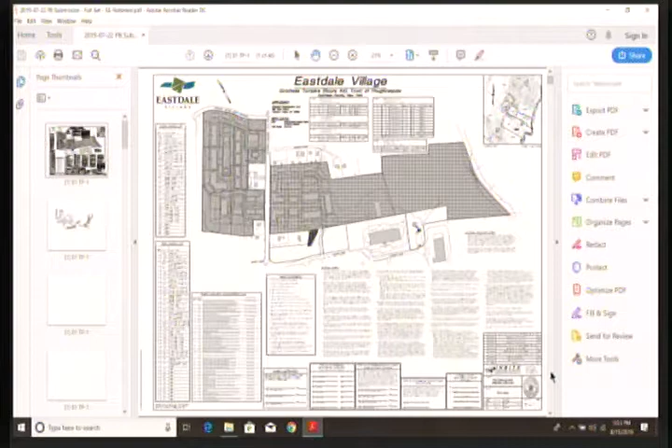Again, this is an overview of the west side of the project. Currently under construction are the three-story residential buildings 11, 10, 9, 8, and 7. Those are up, and in fact, building 11, all the way to the south on the site, is nearly complete. That'll be our building with models.

Building 1, which is the 50-unit, three-story elevator service building, is up and the finish work is ongoing there. The medical office building is up and all of the electrical and mechanical rough-in work is ongoing in that structure. We have the mail and leasing building under construction, and one of the cottages, Cottage D1, has been framed and is waiting to get the trusses and roof on that structure.

So quite a bit is going on in terms of the buildings, and a lot of the infrastructure, water, sewer, drainage, are going in as we sit here.

The work on Route 44, the DOT work, is proceeding across the frontage. This coming week we will be working at night, Monday, Tuesday, Wednesday, and Thursday evenings. There will be night work in that area, with one lane open overnight, but we have to close it down from the current 2-lane configuration to 1 lane to get some drainage and communication structures and communication lines across the road. So we have one week of night work, then we're back to the regular day schedule, with 2 lanes remaining open on 44 during the remainder of the roadway construction.

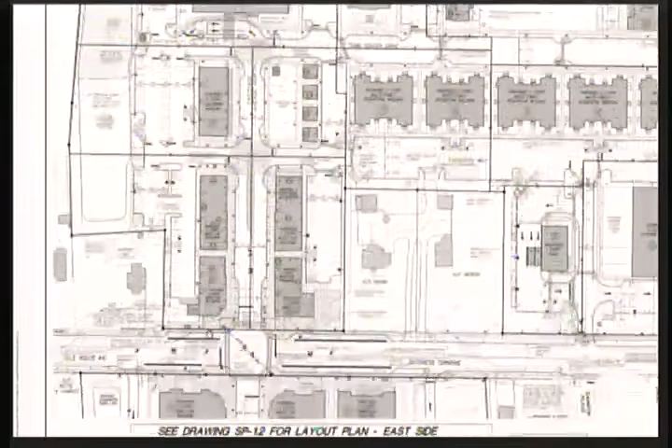We imagine each of these buildings built with party walls between the ones that are actually connected. But we've got really six buildings there, and then five buildings on Building E. The buildings will be separate, standalone — there'll be a party wall, but they'll have their own separate architecture, separate entrances and exits, and separate utilities serving each of these buildings. We've been able to really define those buildings more completely to meet the needs of the tenants there. So that's been going well.

I can go through this if you want, but we've talked in the submission about the number of stories of each of these buildings. Above each of them there are also residential units, one or two bedroom units depending, included as part of this development. For the most part, the A buildings on the south side of Eastdale Avenue are all proposed to be 2-story, at this point, with the proposed lessees. Some of them have basements, some don't.

On the north side of Eastdale Avenue, this front building, Building E1, is proposed as a 3-story building, drops back down to two 2-story buildings, then a 3-story building for the larger E4 building, and then back to a 2-story building. So we're going to get some variation in height as the buildings are further developed.

Architecture isn't complete on these. Really, our approach is we have partner tenants and owners in these buildings, so we'll ask for site plan approval first. Once site plan approval has been granted, we'll go back out and finish the funding with the lenders. That releases all of the remaining funds to complete the architecture, and we'll come back for architecture review so those buildings can move forward.

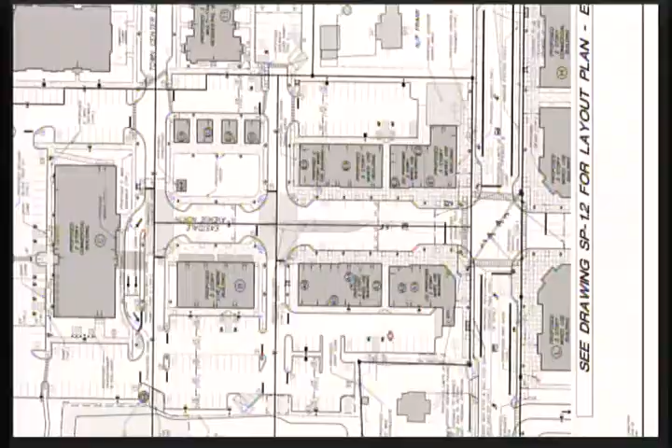The third thing we changed is we modified our phasing plan. This first phase, what we call phase 1 and phase 2A, really includes everything on the west side of 44, with the exception of these two pads out front - what we've called the bank and the daycare buildings F and G. Those are not included in this initial phase, so we are moving forward with the infrastructure and the work on the rest of those buildings.

Following site plan approval, we'll certainly be following up with building permits for the remaining buildings. The buildings that weren't in the initial phase that we've added are these two buildings back here - again, three-story elevator buildings, 2 and 3 - the townhouses, buildings 4, 5, and 6, and the remainder of commercial building B. I think those are the only additions to the phasing plan.

Yeah, but again, it's the garages in back also? I'm sorry, say again - the garages in the back also? Oh, and the garage in the back, yes, yes. I don't have them in my window here, but yes, and the garage in the back, yes, thank you.

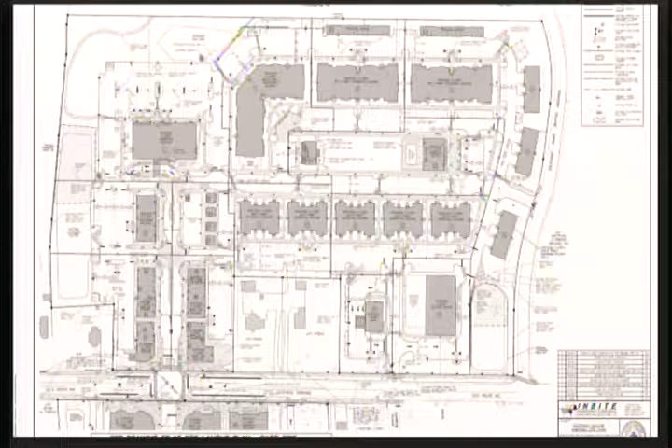And then the last change was something that was contemplated in all the original documents, and that was the outdoor dining. Going back to the commercial buildings, we have restaurant tenants that want outdoor dining for both building E1 and building E5. That'll have some outdoor seating for patrons at both of those buildings. There are specific requirements in the zoning code related to outdoor dining, and I believe as we described it, we meet those specific requirements.

Are they the only restaurant tenants, or are there additional ones? No, there may be other restaurants as well. Yeah, you have wide sidewalks, so they're always free to put a couple tables out too. Yes, and there may be some uses out in the front here, but these particularly lent themselves to a larger, more defined outdoor dining area.

So, all right, is that all? That was all, yes, initially. So we have some questions and comments about some of your comments. But yes, that was it. Yep, we'll get into that. Sure, let me go to Eric. Sure.

Staff, we have a number of comments - a few for discussion by the board packets. But assuming the board indicates some direction on those, we're recommending that you could proceed with a conditioned approval. I will note that in the resolution provided at the end, there's a typographical error in which it's printed as an approval for the third amended site plan, where that should be an approval for the fourth amended site plan. That's a typographical error in your resolution that should be corrected.

At the rear of the McCaffrey property, there's a fence, and they'd asked for a gate at the fence because they have a camper there—they wanted to be able to access it if necessary, to drive their vehicles through and exit onto the property. So that gate has always been there. That access was always one of the things we talked about. It's not something expected to be used regularly; they just asked to have a gate at the rear of the property to be able to exit the back end of their driveway. So we accommodated them and put the gate in. I don't know if that's what you're referring to at the backside.

Okay, so those are our comments. Great, thanks, Eric.

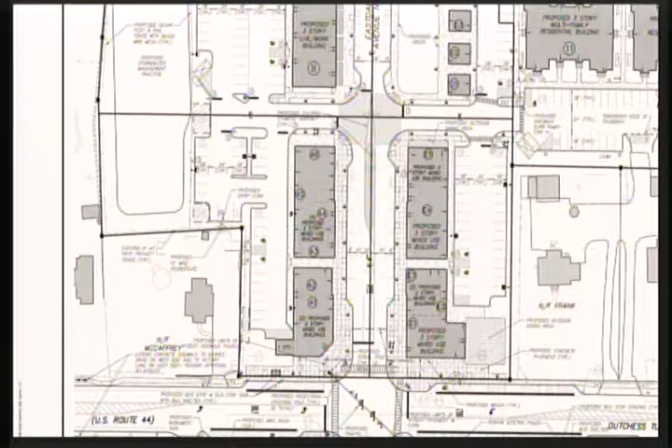Any new engineering issues right now? Jeff already mentioned the SWPPP addendum, which we had asked for. We wanted to see a little more detail on the Ortega connection, and were curious as to what the generator is going to be doing out by the parking area.

I'm going to do the generator first. That's—the elevators in buildings 1, 2, and 3 will be on that generator, so it's just a backup to power those. So is number one, the temporary access or future access to the Ortega property. And if I can zoom in a little bit here.

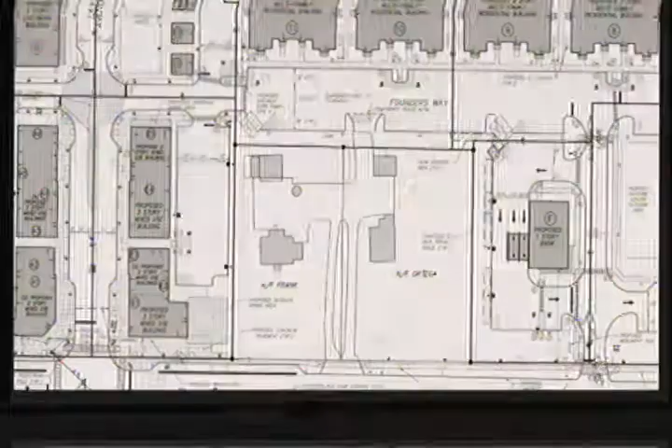Again, this is the Ortega site, currently the home of the leasing office for Eastdale. It was purchased, and we have not really integrated it into the overall site here, but we know at some point we're probably going to want to. So rather than build curbing or a situation out here that we'd then rip out within the year, we thought let's show what could be a future driveway access into the Ortega site, with a temporary grass berm so you can't drive through there.

I did notice that one of the plans actually shows a construction entrance pad that's not supposed to be on these plans—that'll come back out. That construction entrance isn't what's expected to happen there. This is just a future condition; we're trying to think ahead into the site so we'd have fewer changes in the future. So we've got a berm there, and created these two islands to channel traffic in the future.

As part of this process, part of the phasing plan, we recognize that to build Eastdale Avenue, we don't want people using the sidewalks right here in front of these buildings when we have to build the building right here. It's too unsafe. So recognizing that, and recognizing we're going to want to break ground on those buildings, what's the right spot to have pedestrian access from our buildings out into the sidewalk network across 44? It became an opportunity to create pedestrian access from Founders Way, behind the residential, onto the current driveway for Ortega, and then back out into the sidewalk network. Good questions were raised.

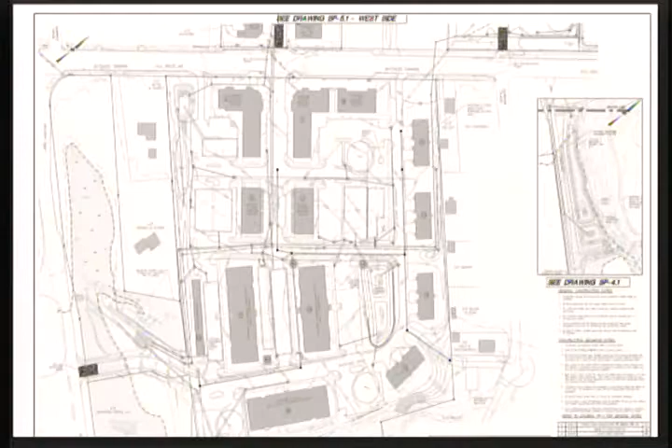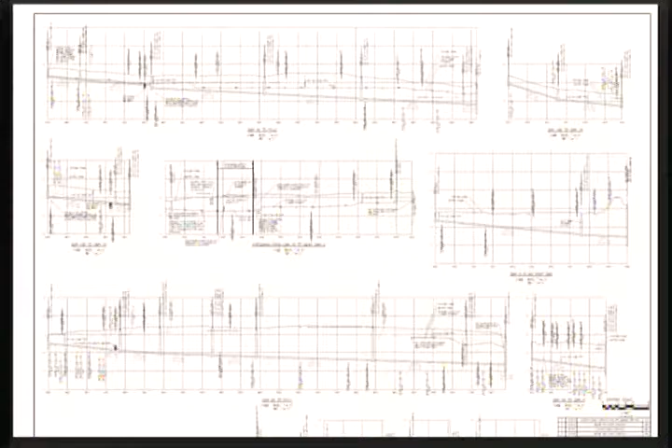I think 3.1 shows it best. I went too far now. Zoom in. Jeff, that's sheet 10 of 40. Yeah, it's still going the other direction, sorry. Oops, sorry.

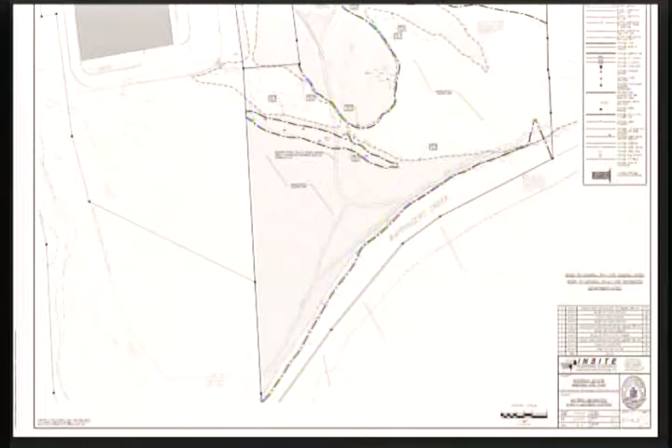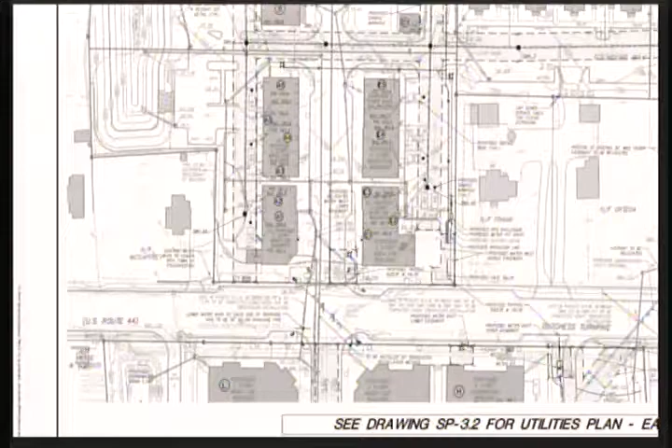Okay, so it's off to the side there. The dining area, in between the dining property. Just trying to understand how accessible that is from the patio there. So the easement is this hatched area here, right? And then this fence symbol shows the outdoor dining area. Okay, so it overlaps it a little bit there.

Right, so it overlaps it probably 20 feet into the outdoor dining area, which is significant for the success of the tenant here, the owner. So with understanding that, yes, there would need to be access when there needs to be access. Right, that's why we weren't proposing anything permanent over the easement or over the pit itself, as long as the water department's satisfied, I guess that's, right, okay.

Anything else, Nicole? No, that was it for now. Rocco?

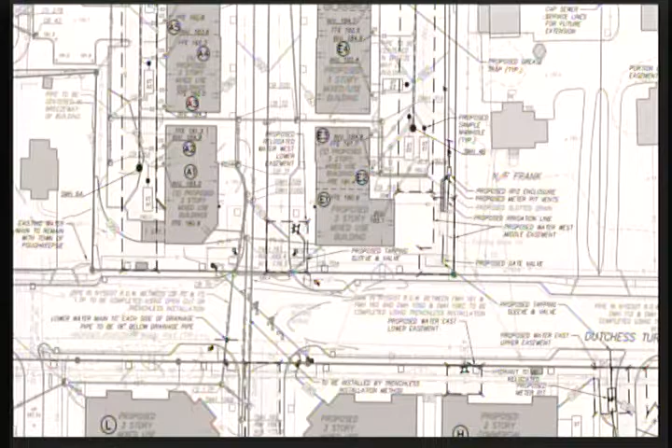Sticking with that outdoor area a little bit, looks like if you go back to the previous one that showed more sidewalk there, I guess the building moved in a little bit. Would there be tables on the outside of that, on the 44 side? There's not a proposal to put tables out there, so the intent was to contain the outdoor dining within that little fenced-in area, but not extend it out. So it's going to be a low fence all around it?

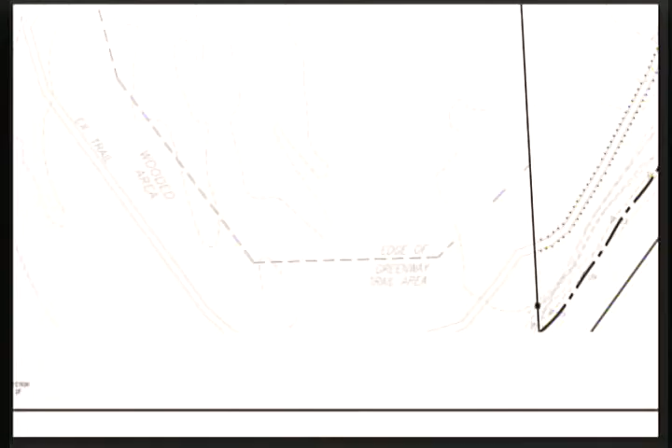Yes. Okay, because the other issue was, what's the setback from 44, and is there any hazard that a car might go up in there? Yeah, right, and we've kept them 20 feet back from the 44 curb line, so.

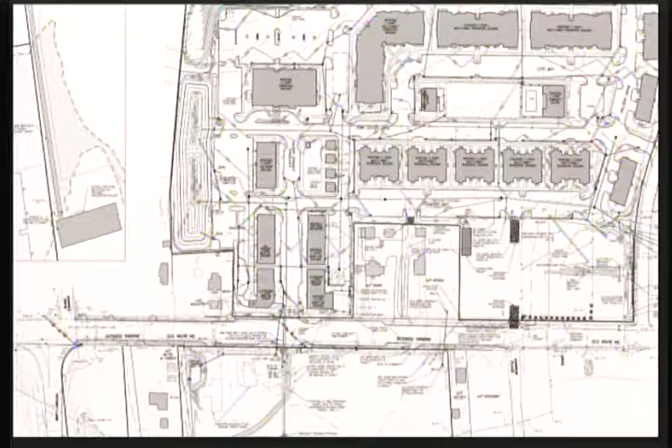All right. Okay. And that expanded sidewalk area to the west or east of there, in front of building E1, that you have, so that's going to be approximately 20 feet wide. Yes. All right, and that would be in addition to the sidewalk? Well, I guess that's really from, I was measuring from the curb face back. I call that all sidewalk, or it's all patio. It's all really kind of one concrete plaza.

I wasn't sure. It won't be two different surfaces at two different levels? The plan shows the grid, which may help. Yeah, no, yes, they're all at the same level. We've been working a lot with DOT and with the drawings there to keep that to look as one contiguous plaza there. Yes. As long as you've addressed the safety issue, I'm okay.

Okay. Thanks, Rocco. Joan? I would just echo Nicole's concerns about a taller fence along the property line with Frank. That'd be my primary concern. Thank you.

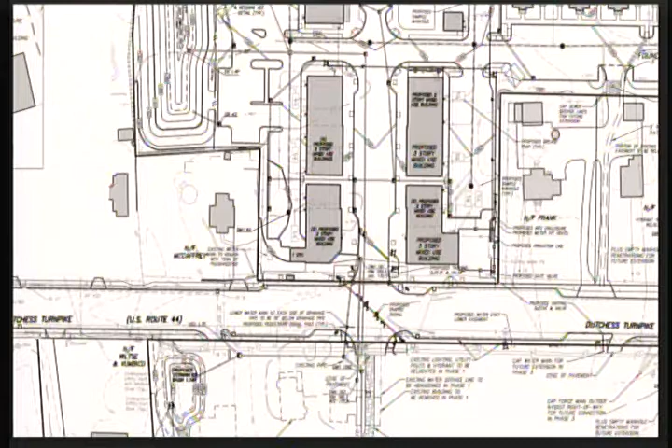Thanks. Ben? Anything? No, I think I had some questions about the outdoor dining too, but I think it's been covered. Thank you. Great. And Peter?

Well, here's a surprise. I have a question about outdoor dining. Is this a franchise? No. Okay. Yeah, I'm looking at the dimensions that you have here. It's not a national franchise. I don't know if there's another. I'm just wondering if they had a requirement for square footage for the outdoor dining. Some franchises have a pretty strict requirement. Yeah, it is not.

My question is, when I'm looking at, and of course some of the scale here is kind of crazy to figure out, but it looks like it's about 40 by 40 foot square. That's 1,600 square feet. It seems like an ample amount of outdoor dining space when I look at the size of the restaurant itself. And if you could, in some way, diminish that just partially, it would give you some extra space on the Frank property side to give everybody a little bit of breathing room.

Anyway, it's just food for thought, that's all.

On Eastdale Avenue, you're squeezing. Is there a median? There's not a median. I thought you said you were going to diminish the width of Eastdale. No, we diminished the spacing between the trees. The number of trees and lights down Eastdale Avenue increased, so we decreased the spacing as you're driving down the road, but the width of Eastdale Avenue remained the same. They were 30 feet on center and went to 20, just to give more trees and more lights as you're going down the street.

Yeah, you don't have to go crazy. No, it's right. It's important.

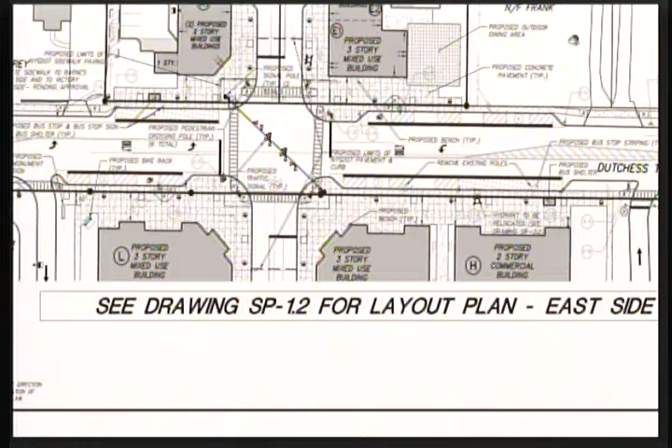So for Eastdale, we have both. We have the stamped pavement here to really provide a sense to the driving public that this is a pedestrian area, so it's a change in texture and color. Stamped colored pavement at both this intersection with Founder's Way and this intersection with Town Center Drive will provide some traffic calming. The parallel parking with the bump outs of the curbing at the corners also slows it down.

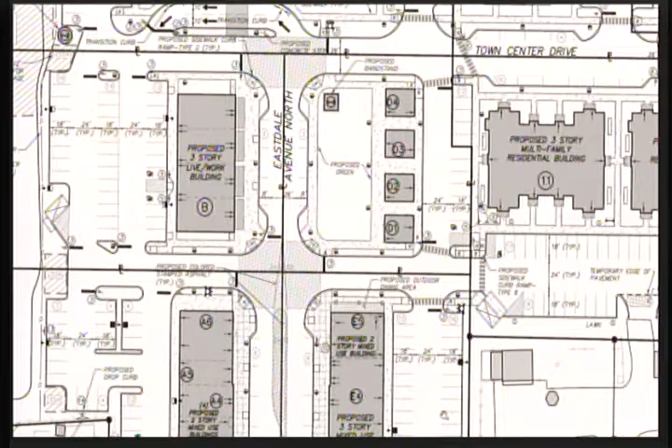I'm just thinking about, since people are going to be entering the store from the street, and you have drivers trying to make that light on Route 44. I'm just thinking about human nature, if there's some way to—if you think you have sufficient traffic calming, right?

And again, the striping in the center here, yes, for a median—there's not a raised median, but there certainly is a bullnose median at the further end, and then we have the turning lanes as you get closer to the signal. So we think we've really tried to make this pedestrian friendly and make the drivers pedestrian aware.

One of the things we've also talked about internally, we're going to add speed limit signs limited to 15 again, so there's some awareness of the driving public that this is really a go slow zone in here, because...

I will tell you, we've talked about whether there needs to be a mid-block pedestrian crossing here. We don't think so, but I'm going to reserve that thought and come back to you. And if we think it's creating a problem, we're going to come back and talk to you about wanting to add a crosswalk in the middle there.

We just need to make sure that it doesn't back traffic out onto 44 or create some other kind of pushback that we didn't take into account. But we are trying to be aware of that.

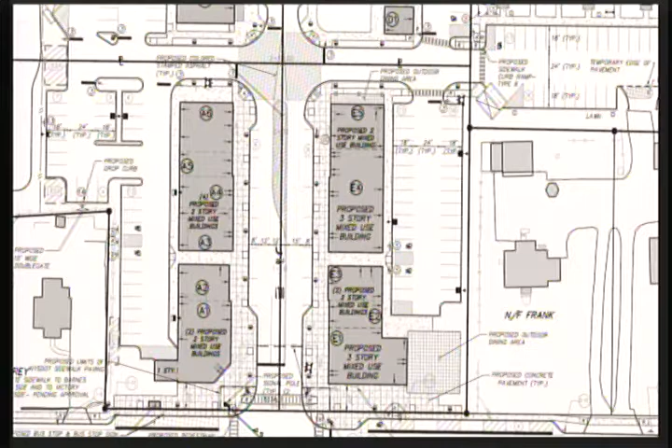Is the land bank parking on the east side? The land bank parking currently is all on the other side. Okay, I'm just saying we should be mindful because we're losing some parking spaces here. We don't know really what's going to happen in the future, so I just don't want us to be over generous. If there's a continued deficit in parking, especially on the west side, we're going to probably take a close look at that.

On the buildings E and A that are facing Route 44, I'll call them the gable ends of those buildings, we're going to want to see something there. You know, these buildings are great—these renderings that you gave us.

They're everything for McDonald Heights Town Center. This is pretty much, I think, what the town board had in mind when they conceived of this idea, and honestly I never thought anyone could pull it off. But you're actually accomplishing what they had conceived could possibly happen. When we get to architectural review, we're going to want to take a look at the gable ends of those buildings since they are going to be facing Route 44.

And you know, it's going to be the first impression that people get, not only when they drive by, but when they drive in, which is something I'm sure you want people to be impressed by. So we're seeing one elevation on the drawings that we got. We wanted to take a look at both elevations since the people who live there and the people who are going to be your customers are going to want a good impression.

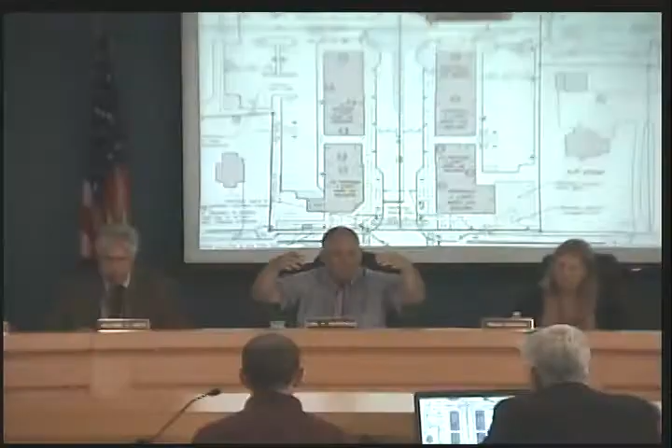As well as the fence, what the fence along Route 44 looks like. I'll throw in my two cents - I was focused on the architecture as well when I saw these plans, how it's going to look, because it was originally proposed as two 3-story buildings, all L-shaped. Now you've got a 3-story on one side and a 2-story with a 1-story piece sticking out - how's that whole thing going to look as a streetscape? Because it's not quite like these conceptual plans.

Right, those were just very conceptual, how we wanted the streetscape to ultimately look, and that's why I said as we develop the architecture we'll come back building by building and explain that to you. But this 1-story building is really a loading area for the user in this building - that's the intended use. They'll back their vehicles in, load within the building, and leave the site again. But having said that, it absolutely has to have some architectural consistency with the rest of the structures.

Not some little flat-roofed thing, it's not going to be a little flat roof shed. That's right, but that's kind of the use of the building. All right, just keep that in mind with the architect. I don't know if you have the same architect that did the concept drawings or not. Yes, we do.

My other concern, from a view shed point of view, is now that the buildings have shrunk from the L shape, what they were accomplishing was hiding the parking lots in back as well. So I don't know if there can be some additional screening, so you're not really staring at the parking from Route 44 while walking along.

So I think you're particularly focused in this area? That area, and then even the other one, looking across here from Route 44 - you're looking right across the dining patio into the parking area now. I guess you said there's a 3-foot fence.

We've got pavement and concrete out here. Is adding more screening back here acceptable? Again, if that's the goal, what I was - hide the parking, is that basically what you're going for? Yeah, that's basically it.

Okay, all right. Because of the L shape of the three-story, yes, it did extend further out, and it's the same on the other side of the street, so we did beef up the landscaping here more, but we didn't do as much here. Sure, all right.

And I guess I'd throw in my two cents too about next to the Frank property - I don't know if you can work with staff on some additional screening or whatever is needed there. Okay.

Is there still planning to be mixed use, so there's some apartments above some of these? Yes, each of these has apartments, it varies if they're 1-bedroom or 2-bedroom above each of the structures. But they all have residential uses above.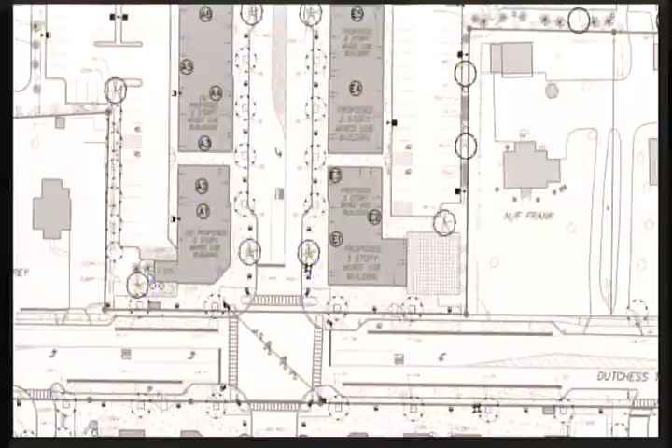I move that the planning board find that the action contemplated by the Eastdale Village Fourth Amended Site Plans, revised through July 22nd, 2019, and by correspondence and attachments dated July 22nd, 2019, is consistent with the SEQR findings statement for the McDonald Heights Town Center as adopted March 15, 2018. And I move that the planning board grant conditional amended site plan approval for the Eastdale Village Fourth Amended Site Plan, subject to the following.

Respond to the comments of all reviewing departments and agencies, said responses to be reviewed by the planning department as to adequacy and completeness, including but not limited to the following, items 1 through 10. And I'd like to add what we've discussed: item 11, screening for the parking and screening for the outdoor dining from the Frank Brothers property. Second.

Moved and seconded. Call to question. All those in favor? Aye. Opposed? Motion passes 6-0. Thank you. Thank you.

And I assume you'll be back for architectural review sometime in the near future. Yes, yes.

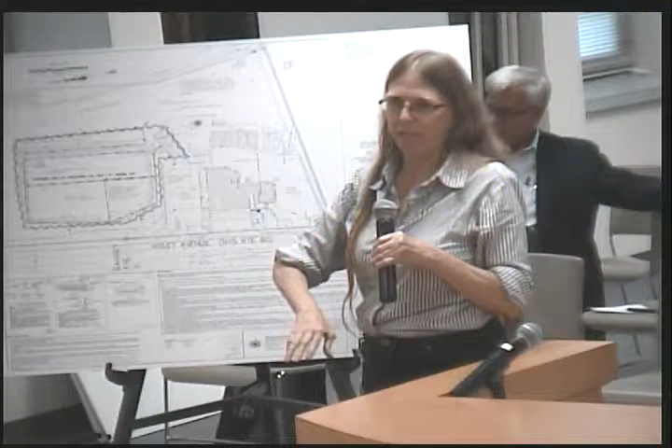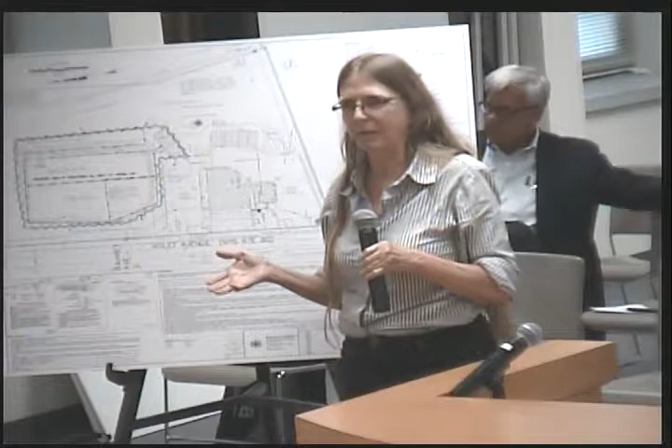One of the comments was about concrete washout. They're about a mud mat. If for some reason they start filling, or they proof roll underneath and don't put any stone back on top right away, they just pour some concrete to protect the subsoil that's been proof rolled. They can put a concrete washout dumpster right here. They make these now, a special roll-off that you just wash out the concrete truck in. That can go right here.

So there's not the concern about this expanding, because the contractor has other areas, and the fire department knows there'll be other areas they can just use for the non-disturbance stuff.

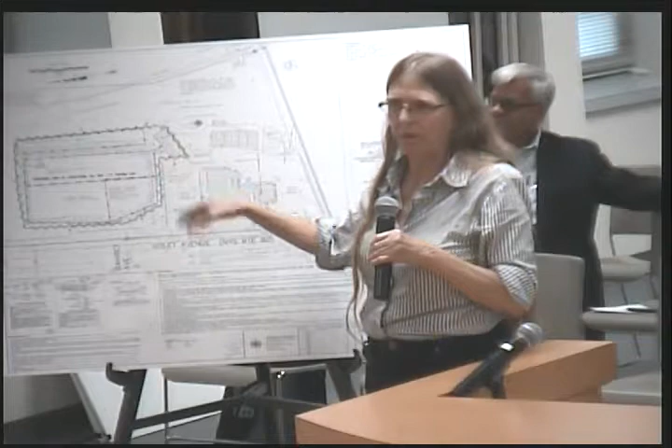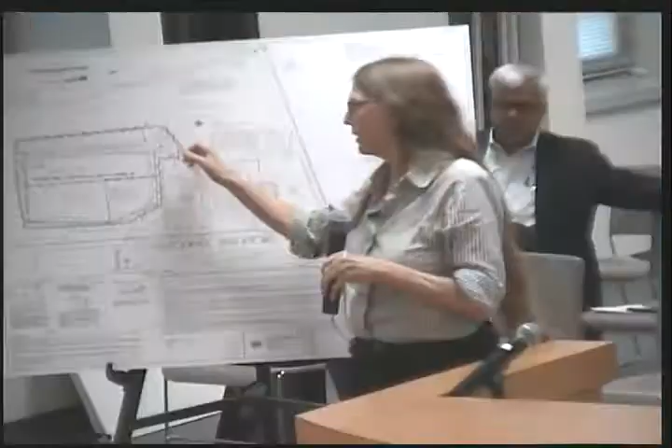I'm assuming one of the comments Andy brought up was whether there was flexibility to reduce that in any way, even down to 0.95, and I'm not an expert, I'm sure these were all designed out exactly how they need to be. Well, actually, the area might be a little bit less than 0.97. I just put down a little bit bigger.

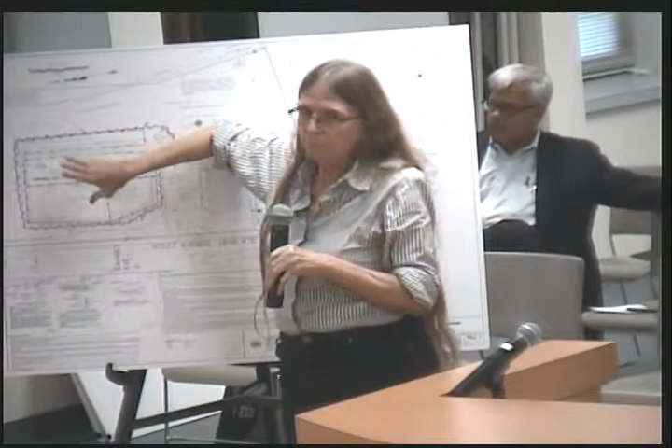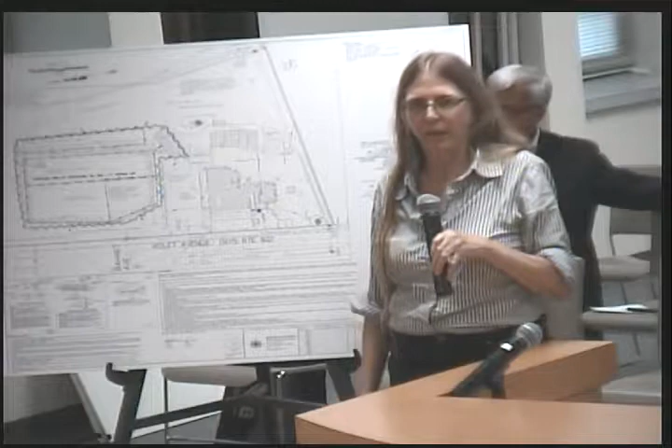Even reducing it, but it's basically what they're thinking the footprint of the building will be, as far as their initial thoughts, to be able to get enough fire trucks and all the other things the fire department needs inside the building.

Yeah, I think we were commenting that if we got it down to 0.95, which you just mentioned, 1,300 square feet, 0.03, so you'd be losing maybe 1,000 square feet, 10 by 100. If you can get that down to that, we probably could waive this.

We don't think you'll be required to do water quality because you're not going with any impervious surface. No, actually, you are. The DEC requires water quality for any soil disturbance. Now it'd be very small because it becomes pervious, but still, when you run the calculations, you have to put in total area disturbance. Then your impervious is zero, but it still comes out the other end with areas. I've done some sports fields, and they required that, and that wasn't anything more than taking trees out.

So it's that. But if you'd like, we can get it down to 0.95.

And then to that end, when you go to adopt the SEQRA neg dec, and correct me if I'm wrong, but if they read into the resolution just the SEQRA neg dec with no date specific, can I modify the draft that was provided to them, no problem? The draft, because their resolution specifically states the date on this document. So I just want to confirm that if I have them read the resolution without stating the date on the resolution or the neg dec.

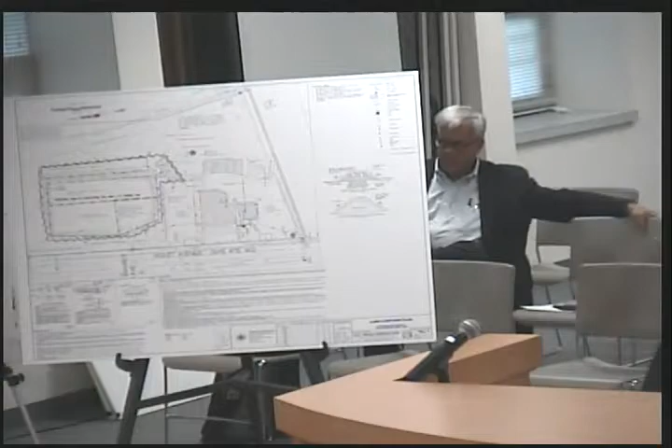This looks like there's a very high water table. Have you done any test holes? They have done deep tests and borings. How deep? I think the borings are 50 feet, and the deep tests were down to about 8 to 10 feet. And what were the results? Some areas it was just a couple of feet, other areas it was deeper. What about on the site itself? It wasn't that bad, we don't anticipate hitting it within 6 feet. When you say it wasn't that bad, what was it? Like 6 to 8 feet over there. They hit water, yes.

On top of what I mentioned, we'll also be raising the site of the building. Even in the back areas where the grade comes off, we're going to be building that grade up to the road elevation. And you feel comfortable with that? Yes, with our geotech.

Thank you. All right, Ben? Whatever happened with the 2 acres that were dedicated at Hudson Heritage to the Fairview Fire Department? Are they going to make any use of that? As far as I know, the district is still looking at that. I don't think these guys are going to be able to talk to the status of that negotiation, but that's still ongoing. We know that from talking to Fairview and to Sabre as well. That seems like a possibility too, and even the logistics of where it's located, I thought it'd be good. That's all, I'm just curious about it. I didn't think you'd have the answer, but I wanted to bring it up.

One other thing, since you're getting the fill from the Hudson Heritage site, which is brownfields, are you going to be testing the soil as you put it into service? Two things: one, before anything is allowed to be dumped on the site, we'll have their paperwork showing they've done the proper testing on their end. And second, we'll be doing standard testing and sampling to ensure what we get is correct, that they didn't switch paperwork en route. All right, you're going to document that? Yes, it's actually on the plans right now. Okay, you'll document that and share it with our engineer, copy him. Yes. Great, thank you. Thanks, Peter.

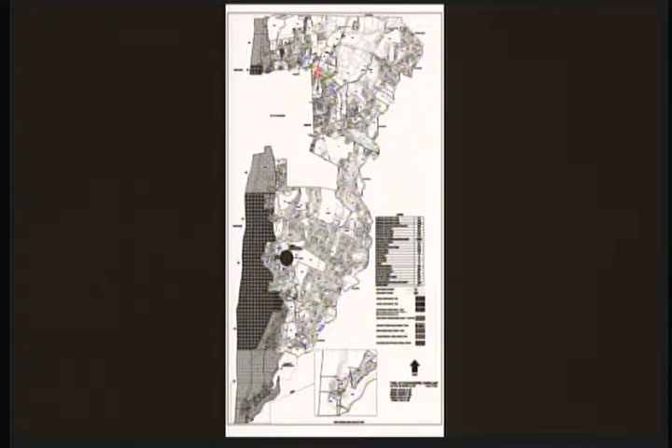Mr. Chairman and Board, Jeff Kane, representing Kirchhoff Properties and this proposed development at Salt Point Town Center. The application is in one of the five town centers that the town created when they last updated the town plan. As required in a town center, it's a mixed-use plan with residential and commercial. The site itself is located at the intersection of Salt Point Turnpike and Innis Avenue - if you're at the light at Innis Avenue looking straight, it's where that red structure is right across the street. We control about 40% of the land in the Salt Point Center District.

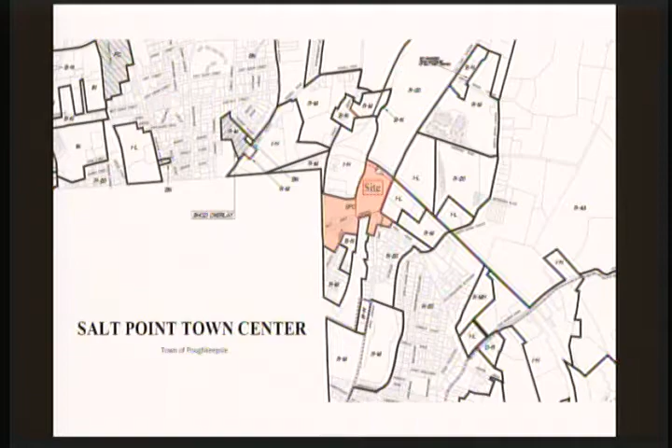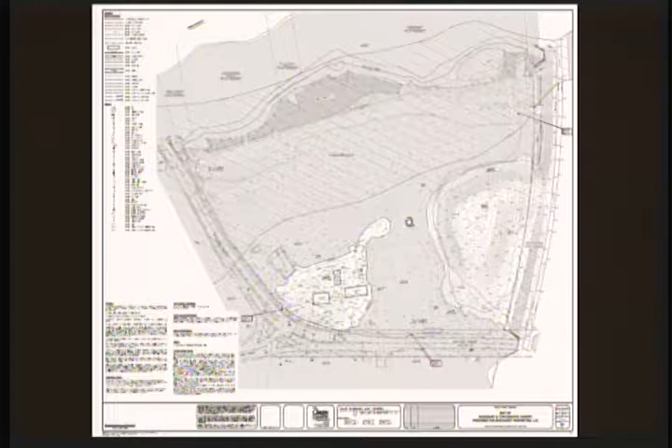The site is marked by a couple of things. One is it has a lot of floodplain and floodway. Here's the signalized intersection at Salt Point and Innis Avenue - everything you see in gray is floodplain, and this line is the floodway line. So none of the development is in the floodway - any development in the floodplain is outside that floodway area.

The concept plan, as described by the chairman in the overview, is a mixed use project: two 24-unit buildings, totaling 48 residential units, a gas station, convenience store with a drive-through and gas pumps, and a commercial building. We've really targeted a medical use for this proposed building, and we've reached out to a number of medical institutions to gain a tenant on this site.

You'll notice this arced line here. There's a provision in the code related to the separation between gas stations in the town, so that line represents the setback to the gas station. The actual gas facilities are separated further from the next gas station than required by code, so we've maintained compliance.

We have an area of soil excavation. Being in the floodplain, not all of this is in the floodplain, but some of the buildings are, and the requirement is that they be sited 2 feet above the base flood elevation. So our intent is to excavate from the area in the floodway and build up the area in the floodplain. The analysis will have to be provided to the engineer for review to confirm we haven't created any downstream impacts, either increasing or decreasing flood storage, since either could have an impact downstream. That analysis needs to be reviewed and confirmed by the town engineer.

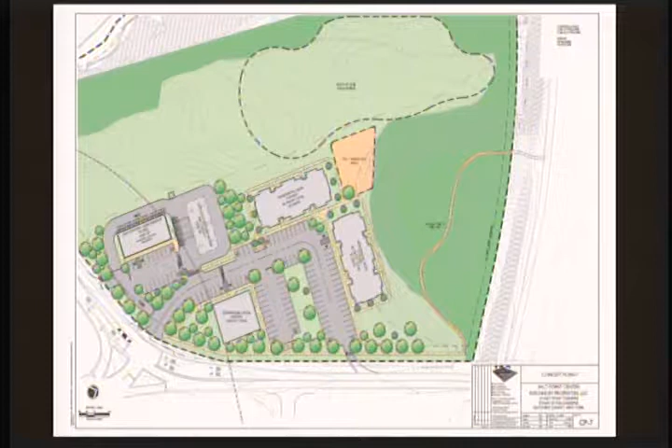How high up does the fill have to be? We have to be 2 feet. But how much dirt is being moved on the site, I'm not sure of the exact calculations. But we're not trucking down town road - we'll keep it on site here.

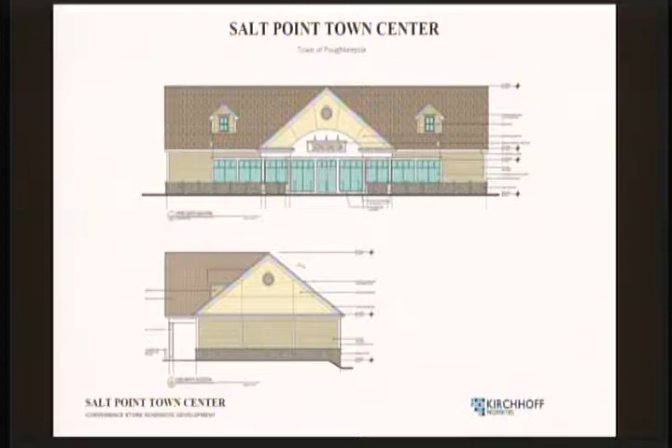We have some conceptual architecture, again looking to make sure the site, certainly on the commercial buildings, keeps away from any kind of flat roof look. This is the proposed convenience store associated with the gas station.

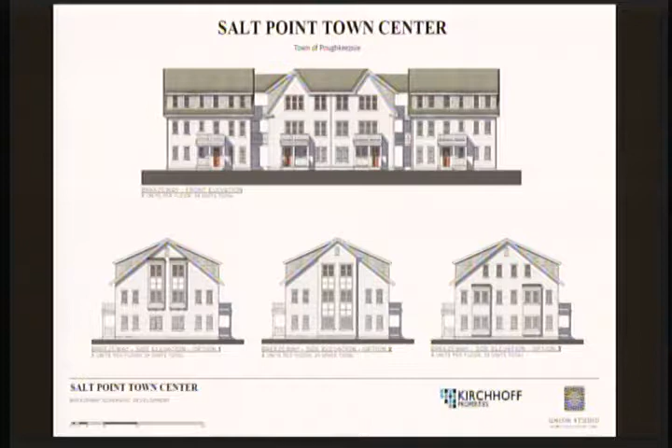And then some of the conceptual architecture for the residential units. I'll mention we actually developed this architecture for use at the Eastdale project, with a little different model, but many of the looks and materials here are very similar. This is a 3-story model, and the difference is these are walk-up units, so you can see an exterior breezeway connecting the units - 24 units in each of these 2 buildings. Again, we're looking to create some of that more classic architectural style for the area.

And just because the layout helps determine what's going on in the exterior, we've provided floor plans here for the 1, 2, and 3 bedroom units that'll be proposed in the building.

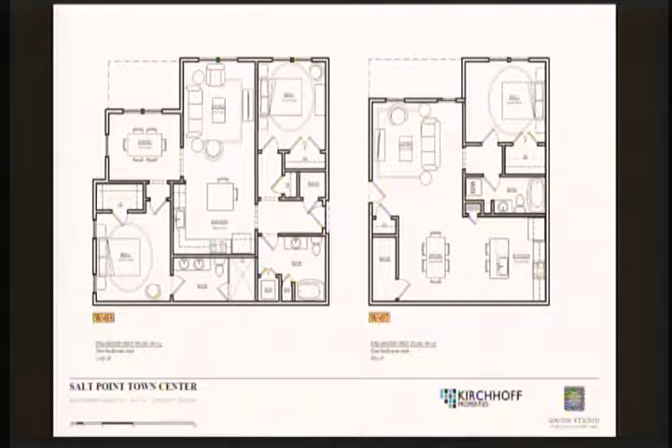Zoning wise, subdivision is proposed along with the site plan, and we've met all the zoning requirements for each of the lots. Lot 3 is the residential lot - again, the minimum requirements and how we've exceeded each of those.

There are a couple of things associated with the project related to zoning amendments, which we've proposed to the town board. One is that the Salt Point Center Zone currently limits height to 35 feet or 2 stories. The other town center zones typically have a little taller height, so we're proposing an amendment to 3 stories and 45 feet as the max zoning height. This provides consistency, and we think it provides a better product here to go 3 stories. Otherwise, you end up with the same number of units, but spread out over more land. So going up here makes more sense for the site.

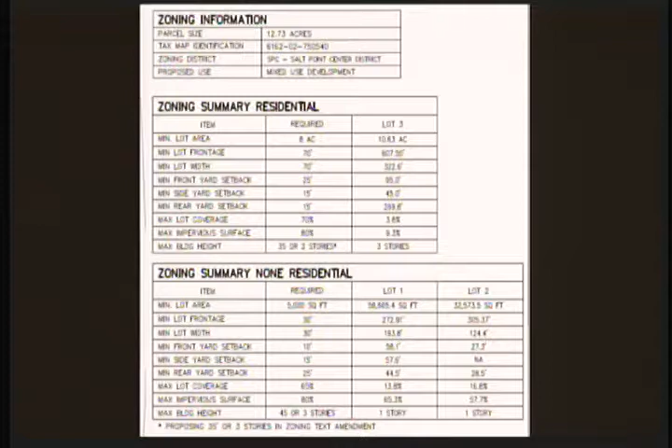Just to run through briefly the zoning amendments that have been proposed - they're provided in a red line manner, but we think they're fairly minor in nature.

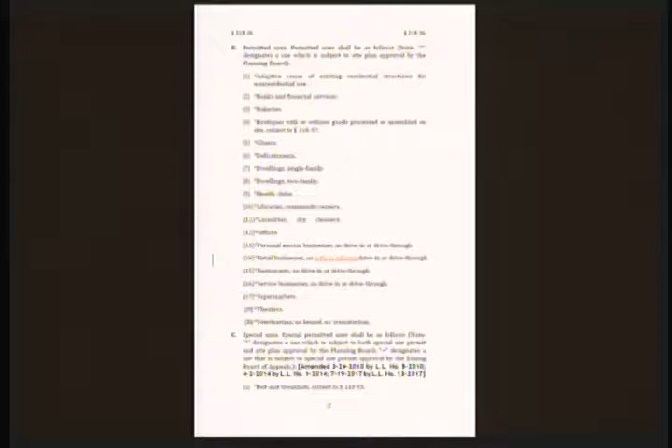Obviously, the biggest change is that a drive-through would be allowed for the retail building - that's a prerequisite for our proposed owner and operator of the convenience store, so there would be a drive-through behind the convenience mart. And then some clarification that a motor vehicle service facility, which is a gas station, can operate with or without a drive-through. It's unclear in the code whether we need to modify it as a retail business or as a motor vehicle service facility. Probably only one of those needs to be finally adopted, but we aren't sure which path the town board would consider with this amendment, so both are in the draft we've presented.

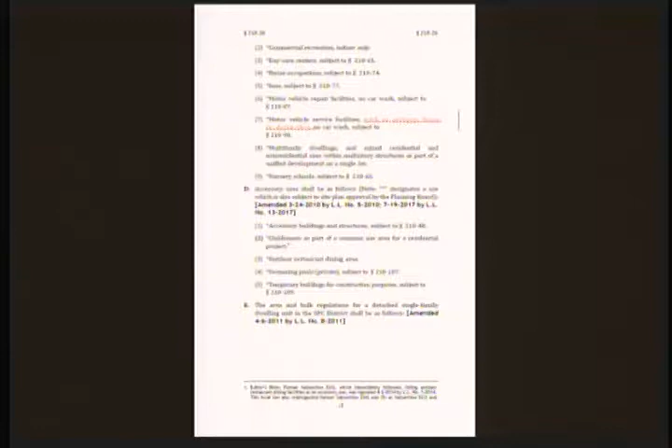Again, modifying the area and bulk regulations to go from 35 feet or 2 stories to 45 feet or 3 stories, consistent with the other town center zones.

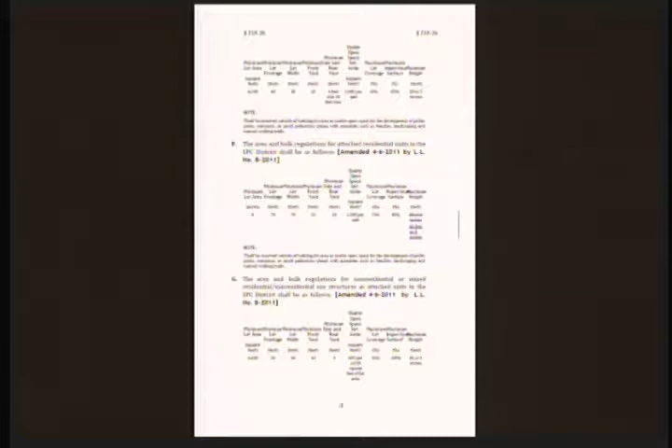As the zoning was adopted, originally adopted, there were some numbering that seemed to have gotten lost as it was adopted. So there's some cleanup language in here, and you'll see this addition of 'I' in the proposed zoning. Again, that's just to provide more clarity to the zoning.

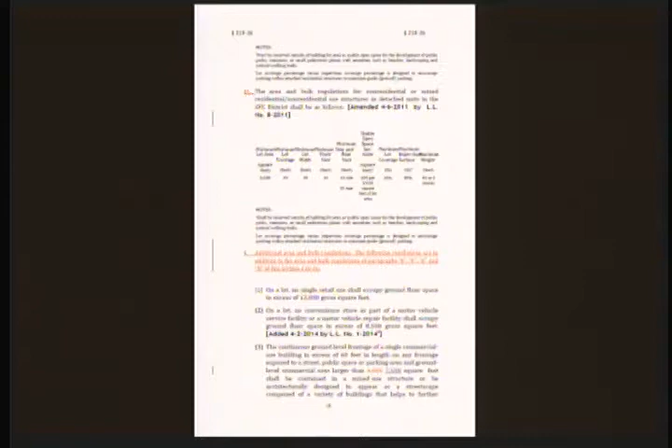And we did suggest one change on discussing the ground level frontage of a single commercial use building, that it be treated architecturally to appear as if it's more than one building. We requested that the minimum size be applied to go from 4,000 to 7,500 square feet. Again, it's an architectural change that we could accomplish either way, but we think the 7,500 makes more sense for a town center.

Then, I guess lastly, there were some changes made to the Mid-Hudson Center zone. In working with the town board, staff, and this board, we thought it made sense to increase both clarity and this board's ability to waive some specific requirements of zoning, if the board found that doing so would improve the plan's consistency with your plan for a town center. So section 9 here gives the board the same kind of flexibility you've been able to use at East Hill Village.

And then the last change is the setbacks. Again, just a clarity that's consistent with the MHC zone, that setbacks really relate to structures, not developments. So if you have what is development versus not development, we just define that better as a structure.

So that's the summary of the proposal. What we've requested is that we've provided the application, the SEQR EAF, together with a traffic study and an EAF, and requested that the board begin the process by circulating for SEQR lead agency. Again, it's the first step the board would do on an application to start that process, and is typically what a board is asked to do on the first application. I think SEQR says at the earliest opportunity to really start that process.